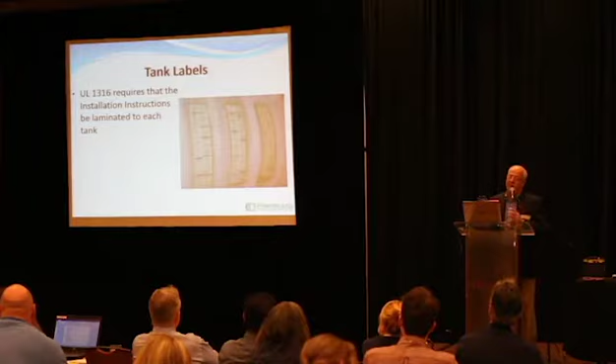No one can ever say that they did not get the instructions on how to properly install the tank. That's part of the UL labeling requirement and internal requirements. All tanks come with the installation instructions laminated to them. So anytime someone says, well, you didn't tell me what to do, that's not true—it's always there right on the tank.

The other thing we would stress is that there's various labeling on the tank: do not overpressurize, do not lift here, use these lifting lugs to safely handle the tank. And I would encourage you, any tanks you see, always look for the UL label. That is the gold standard. That is your assurance that that tank meets the requirements to store the materials intended for. It's been properly constructed, tested, and has the engineering behind it to give long service life.

Along with putting the instructions on the tank, we send a complete package of material with each and every shipment. In that package will be shipping documents, a written copy of an installation manual, which is a 35, 40-page document that covers just about everything we've ever run into.

There are clearly two different companies, at least in the tank business, two different brands, but the information contained is virtually identical. If someone tells me that they have sat through a Containment Solutions training program, I'm fairly confident that they're capable, and vice versa. If they're certified as a Xerxes installer, I think Containment Solutions is very comfortable that they can install their tanks as well.

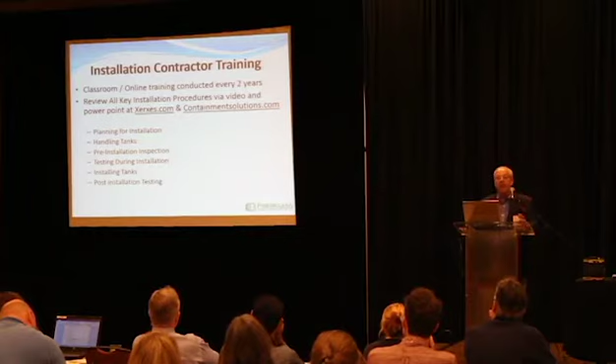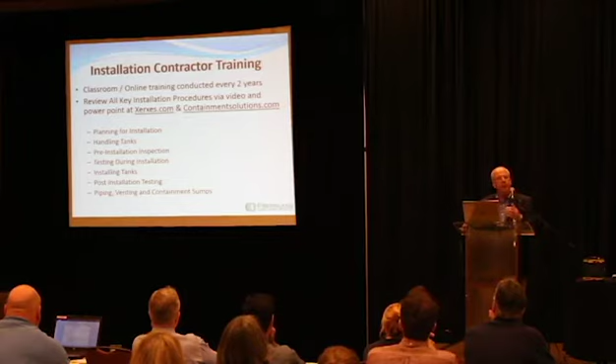Testing during installation, the physical process of getting them in the ground and backfilled. Then any post-installation testing requirements to ensure nothing's happened during that part of the process. Then we cover piping, venting, and containment sump attachment, since that's typically considered part of the tank installation, more on the tank side. So it's a very comprehensive set of steps that we cover for each part of the installation process. And when we tell them there's a written exam at the end of it, we usually keep their attention for most of the four hours.

There's also a documentation program that we have, and I would encourage you that when you're on job sites or talking with your stakeholders in the field, the people working for them, putting tanks in the ground, should be able to document that they've sat through one or both of these programs, as well as the Ameron piece or any other materials they're putting into the installation.

So again, contractor training kits. We have these, but we don't just give this stuff out. When you see the term kit, you might think, well, here you go guys, you're on your own. These are really hand-managed efforts by both CSI and Xerxes. We put a high value on getting in front of that contractor and not just handing him a packet and a video and saying, good luck, hope you retain it all.

So as far as what you can look for in the field, this they typically wouldn't take with them, this is a wall certificate. They can frame it, keep it in their office, put it on their desk, whatever. But I would suggest that all of our installing contractor base should be able to produce a wallet card that says they have been through one of the two programs, or both, and that they've passed the competency test. So I would recommend that, if in doubt, or if the last thing that contractor did was install a septic tank or something, he may not quite be up to speed to do a full-up petroleum installation. So I would recommend you ask them for the documentation.

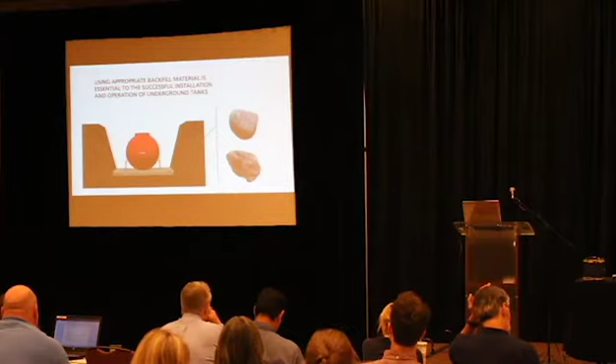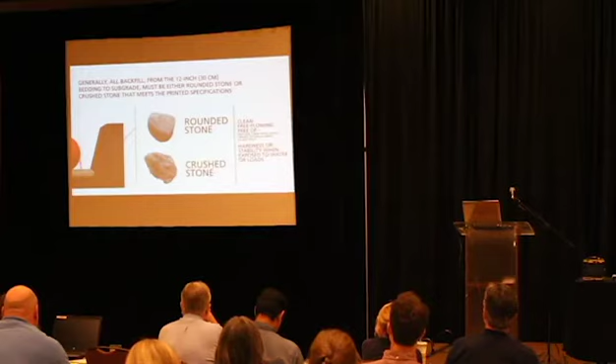Backfill material. Using appropriate backfill material is essential to the successful installation and operation of underground tanks. Using materials other than those specified in the installation manual without our prior written authorization may result in tank failure. Generally, all backfill, from the 12-inch bedding to subgrade, must be either rounded stone or crushed stone that meets the printed specifications. Rounded stone and crushed stone materials are referred to as primary backfill materials in the installation manual.

Rounded stone should be a mix of rounded particles from 1/8 inch to 3/4 inch in diameter. Crushed stone should be a mix of angular particles 1/8 inch to 1/2 inch in diameter. Refer to the installation manual for precise backfill specifications, which reference ASTM material standards.

Excavation requirements. Excavation size is determined based on tank quantity, tank dimensions, along with other key factors explained in the installation manual. Generally speaking, all tanks require a minimum 12-inch thick bedding of approved backfill material. Therefore, key factors for depth of the excavation include bedding, tank diameter, and the required amount of tank cover material, including any concrete or asphalt slabs at grade.

Total depth of cover requirements on our tanks range from a minimum of 12 inches to a maximum of 7 feet. Key factors include whether or not the tank will be subjected to traffic loads and whether the excavation and tank will see groundwater. Refer to the installation manual for specific minimum depth of cover requirements for petroleum tanks.

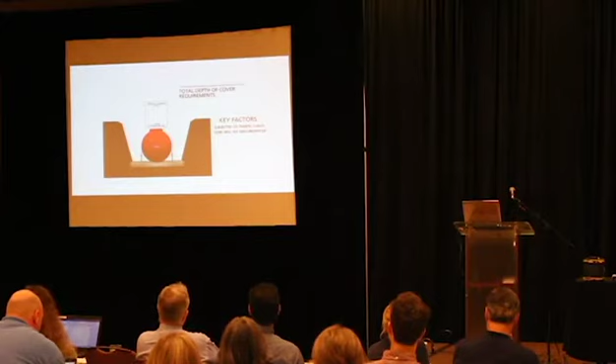Tank quantity, diameter, size, and soil conditions are key factors in determining tank spacing. In all cases, the minimum spacing distance between the tank and the sides of the excavation shall be 18 inches. In the case of more than one tank in the hole, a minimum of 18 inches between tanks is required as well. Spacing between tanks may be greater if tanks are anchored.

If you use dead men for multiple tanks installed side by side, you may have to allow more space between tanks to accommodate the dead men.

If the excavation is in unstable soil, for example peat, landfill, soft, or expansive clay, we recommend that the tank owner seek the advice of a local foundation professional engineer. In your plans, make sure to note that spacing between the tank and the side walls in unstable soils shall be a minimum of 1/2 the tank diameter.

Also, if the surrounding soil is unstable, or if there is a potential for groundwater conditions to fluctuate, geotextile or filter fabric may be required to prevent migration of the bedding material into the native soil or the soil into the bedding. Anchoring tanks: we recommend that every site be thoroughly evaluated for the potential of a rise in the local water table, or of perched or water trapped in the excavation.

Sufficient overburden and/or an appropriate anchoring system must be present to offset potential buoyancy of the tank. If an anchoring system is to be used, note that only our anchor straps may be used when anchoring a tank. We have different types of anchor strap options: standard straps and man-out-of-hole straps.

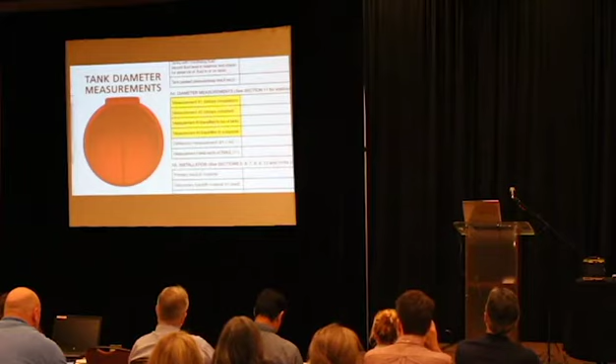This first measurement is used as a comparison reference for subsequent measurements in order to check proper backfill placement and to verify that the installation process is proceeding correctly. Refer to the installation manual for more information on how to take diameter measurements and the allowable tank deflection limits.

On-site air testing requirements: at various stages of the installation process, there may be on-site air testing requirements. To air test tanks, you need to construct a test manifold. The air supply gauge must have a maximum full-scale reading of 15 psig. The pressure relief device must be rated to a maximum of 6 psig, or 4 psig for a 12-foot diameter tank, to reduce the risk of overpressurizing the tank.

For multi-compartment tanks, you need a test manifold for each compartment.

Section 2: Handling tanks. Now that we have explained some general planning considerations, we will begin discussing the installation of tanks, beginning with when the tank arrives on the job site.

When the tank arrives at the job site, before unloading a tank, visually inspect it for any shipping or handling damage. You will have to sign the shipping papers provided by the driver. If any damage is observed, this must be noted on the shipping papers before signing. Refer to appendices of the installation manual to determine the dimensions and weight of your tank.

Based on tank size and design, some tanks are rotated on the trailer for shipping purposes, while others are not. When the tank is not rotated, that is, when the tank is upright, use all lifting lugs to unload and install the tank. Rotated tanks have extra lifting lugs to aid in the loading-unloading process.

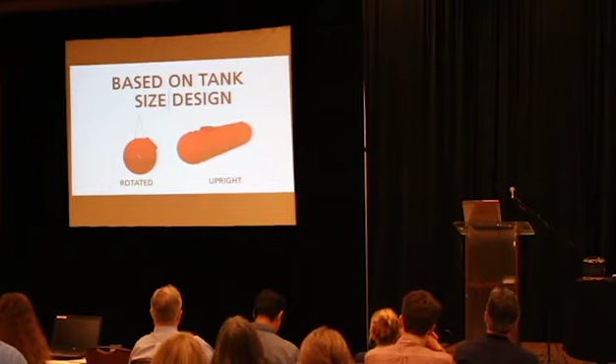Use the lifting lugs that are situated on top of the tank in its rotated position to offload the tank from the truck and place it on the ground. Do not wrap chain or cable around the tank. If necessary, use guide ropes or tag lines to guide the tank. Do not move the tank by rolling it.

Select a solid, level area clear of debris where you can place the tank after lifting the tank off the trailer. When placed, chock the tank, for example, with sandbags to stabilize it.

Section 3: Pre-installation inspection. Our tanks are tested prior to shipment, but they must be tested on-site prior to installation to make sure they were not damaged during shipment. For all tanks, the first test is a visual inspection.

Thoroughly inspect the entire outside of the tank, including the bottom of the tank. Rotate the tank so that you can see the tank bottom.

If any damage is detected during this initial inspection or during any part of the tank install, do not attempt repairs. Contact customer service at the manufacturing facility nearest you. Phone numbers are listed on the back cover of the installation manual.

Section 4: Testing during installation. After the initial visual inspection, different types of tanks require different tests during installation. To help you understand which test applies to your tank, we will describe the types of tanks we manufacture, explain how to perform on-site air testing, and conclude by showing the specific tests that apply to each tank type.

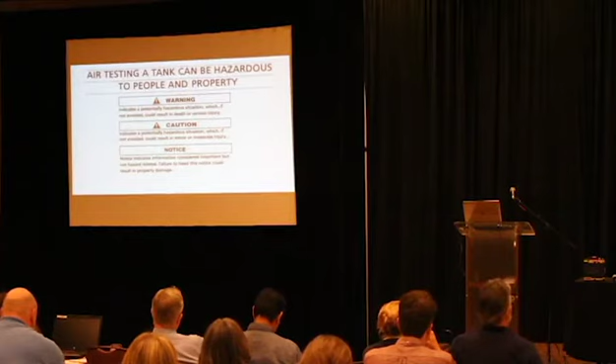Always remember that air testing a tank can be hazardous to people and property. Carefully read all warnings, cautions, and notices listed in the installation manual, and always notify all people on the test site when an air test is underway.

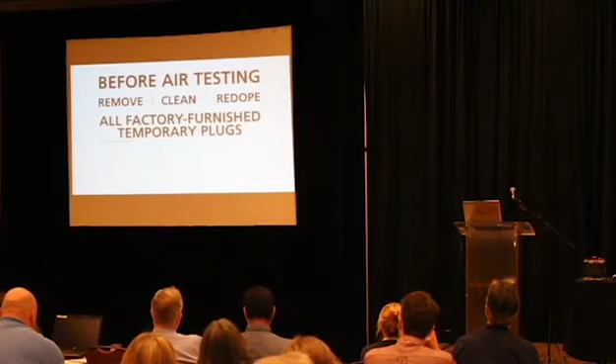Before air testing, remove, clean, and re-dope all factory-furnished temporary plugs with appropriate thread sealant. Then install permanent plugs in all openings where piping will not be installed. Remember that a service fitting is needed for the test manifold described earlier. In multi-compartment tanks, a service fitting is needed in each compartment for a test manifold.

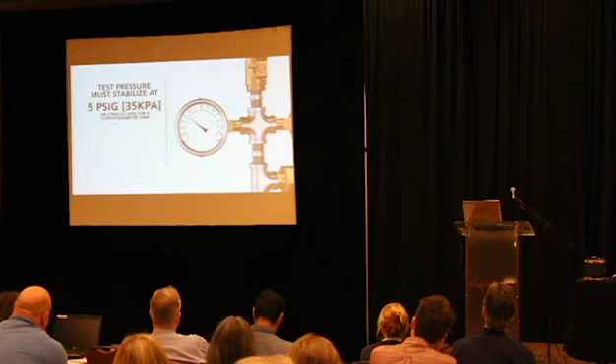In wet tanks, do not plug the reservoir fitting when air testing the primary tank. The test pressure must stabilize at 5 psig, or 3 psig for a 12-foot diameter tank, by adding or removing air as necessary. You must allow for pressure variations when tanks are subject to abrupt temperature changes.

When the pressure stabilizes, close the valve on the test manifold and disconnect the air supply line. After the pressure stabilizes, the minimum air test duration is 1 hour if you are testing the primary tank or interstitial space. Note that you will never apply air pressure to the interstice of a wet tank.

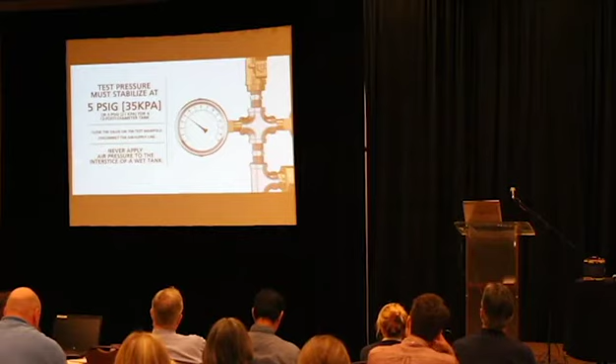When air testing a dry tank, you must never apply pressure to the interstice directly. Those tanks come with a quick disconnect assembly connected to the interstitial monitor fitting. The assembly consists of a gauge, a valve, and a hose. This assembly is not connected to the primary tank until after the primary tank has been tested.

Without releasing the pressure on the primary tank, after testing the primary tank, you will insert the hose into the quick disconnect fitting of the primary tank. This will allow air pressure to flow from the primary tank to the interstitial space.

After pressurizing a tank, apply a soap solution to the tank to check for leaks. When soaping, watch for active air bubbles, which indicate a leak. If you are applying air pressure to the primary tank, soap only the fittings and manways. If you have pressurized the interstice of a dry tank, soap the entire exterior of the tank.

If soaping the entire tank, rotate the tank to check the bottom. Rotate the tank slowly and carefully to avoid developing too much momentum. Make sure the tank's fittings and manways never touch the ground. Do not rotate the tank more than 120 degrees from the tank's upright position.

If your air test is successful, carefully release the air pressure, remove the test manifold, and continue installing the tank.

Now it is time to discuss the specific tests required for each tank type. Testing a wet tank: the first test is a visual inspection of the interior and exterior of each compartment for the presence of monitoring fluid. On the top of the tank, there is also a reservoir. Check that there is monitoring fluid in the reservoir, measure the level, and record it on the installation checklist.

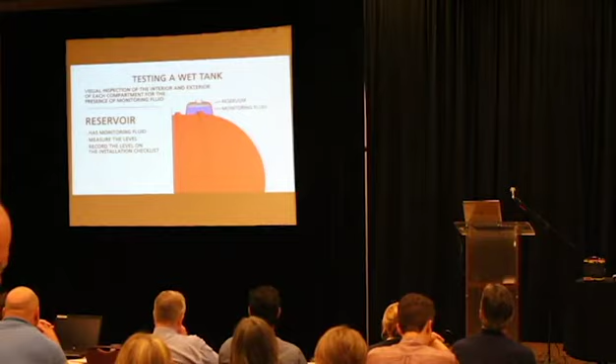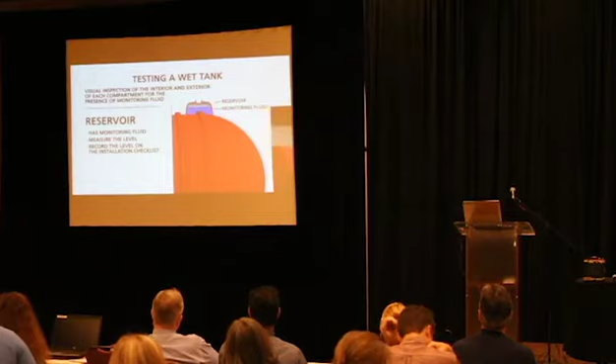If no monitoring fluid is observed inside or outside of the tank, and you have observed and recorded the level of monitoring fluid in the reservoir, you will conduct an air pressure test of the primary tank when backfill has been brought to the top of the tank. When air testing the primary tank, soap the fittings and manways, and look for active bubbles in the monitoring fluid of the tank reservoir. Monitor the pressure for 1 hour. Remember, air pressure can never be added to the interstice for this type of tank.

Testing a dry tank. Dry tanks are shipped from the factory with the interstitial space under vacuum, and are shipped with a gauge assembly attached to the monitor fitting. This allows for monitoring the tank during shipping and handling. The date that the vacuum was applied is on a label near the monitor fitting, or on the shipping papers delivered with the tank. You must record the date and vacuum gauge reading on the tank installation checklist.

For these tanks, you must meet the following interstitial vacuum requirements. First, the tank shipped under vacuum must be under vacuum for a minimum of 7 days, as indicated on the shipping documents and/or tank labels. Second, the vacuum gauge shipped with the tank reads at least 12 inches of mercury. If the tank meets both of these requirements, you may continue with tank installation. If the tank fails to meet either of these requirements, or if the tank was not shipped with vacuum on the interstice, you must air test the tank.

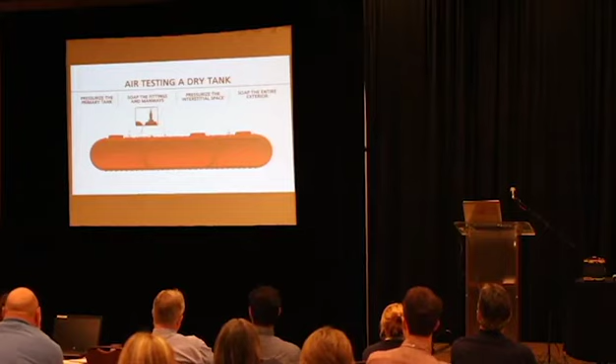When air testing a dry tank, you pressurize the primary tank first, soap the fittings and manways, and monitor the pressure for 1 hour. Then, after the primary tank has been tested, use the quick disconnect assembly to pressurize the interstitial space and soap the entire exterior of the tank. You must also monitor the pressure on the interstice for 1 hour.

After you have either met the interstitial vacuum requirements or passed the air test, you will conduct an air pressure test of the primary tank when backfill has been brought to the top of the tank. At that time, you pressurize the primary tank, soap the fittings and manways, and monitor the pressure for 1 hour. This concludes the discussion of specific test requirements for each type of tank.

If the tank does not pass these tests, or if any damage is detected during any part of the tank install, do not attempt repairs. Contact customer service at the manufacturing facility nearest you. Phone numbers are listed on the back cover of the installation manual.

Section 5, installing tanks. Before beginning tank installation, take a tank diameter measurement. Record this as measurement number 1 on the tank installation checklist. You will measure the diameter again later and compare those measurements to this initial measurement.

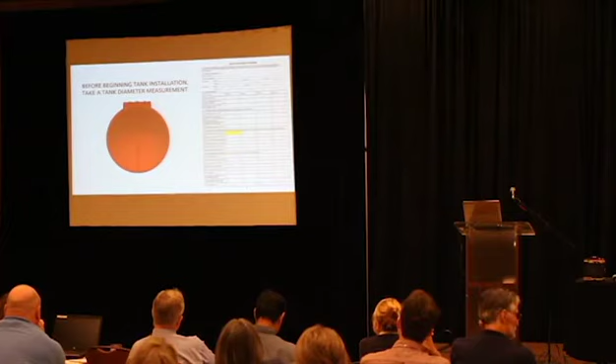If geotextile is used, it is placed on top of a slab or under dead men. If an anchoring system is used, it should be placed in the excavation before the tank. There needs to be 12 inches of approved backfill under the tank as bedding, including when an anchoring system is used. For certain diameter tanks, an option is for the dead men to be placed so the bottoms of the dead men are even with the bottom of the tank, that is, with the dead men placed on top of the bedding material. We are showing standard placement of dead men in this training video. If dead men are being placed on top of the 12 inches of bedding material, you may need to use different turnbuckles and/or use wire rope, depending on the diameter of tank you are installing.

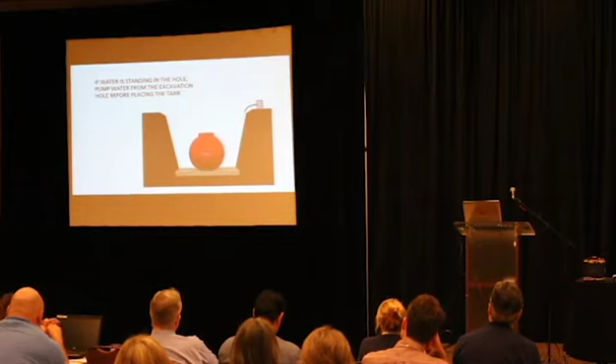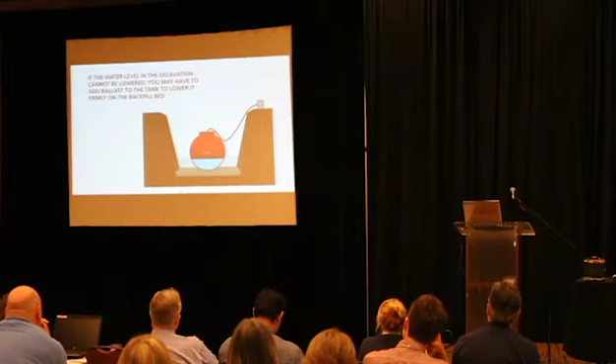If water is standing in the hole, pump water from the excavation hole before placing the tank, and continue pumping to maintain minimum water level during tank installation. Attempt to maintain the water level below the top of the bedding materials until the tank can be fully backfilled and ballasted. If the water level in the excavation cannot be lowered, you may have to add ballast to the tank to lower it firmly on the backfill bed. Use only enough ballast to lower the tank until backfill can be added up to the top of the tank. In a dry hole, the ballast level in the tank should always be lower than the backfill level outside the tank.

After smoothing and leveling the bedding material, place the tank using the lifting lugs. If dead men are in place, center the tank between them. Once the tank is in position, place a small amount of backfill under the sides and domes of the tank to stabilize it. If hold-down straps are used, install them at the locations marked with arrowheads on the tank.

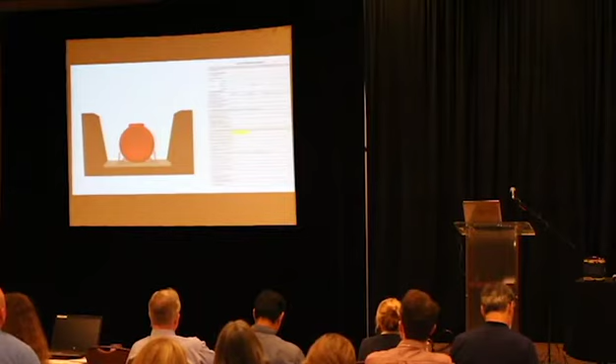Tighten all straps uniformly until they are snug, using additional anchoring hardware such as turnbuckles and/or wire rope. Hardware specifications for each size tank are in the installation manual. After the straps have been installed and tightened, take a tank diameter measurement to check tank deflection and record it as measurement number 2 on the tank installation checklist.

Now you are ready to begin backfilling. For a successful tank install, it is critical that the backfill supports the tank, especially from the 5 o'clock to the 7 o'clock positions at the sides of the tank and under the dome tank ends. This will require handwork. Starting with a 12-inch lift of backfill, use probes to push the backfill completely under the sides and domes of the tank, but do not use metal bars. Take care to ensure that there are no backfill voids under the tank.

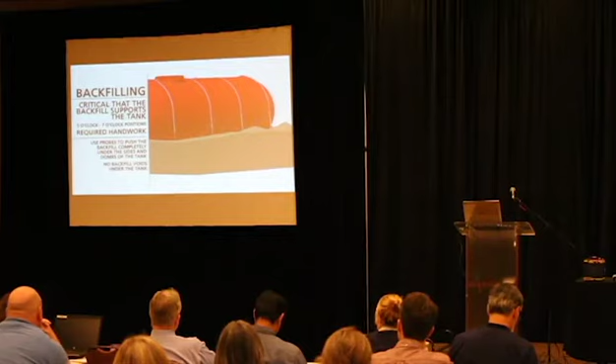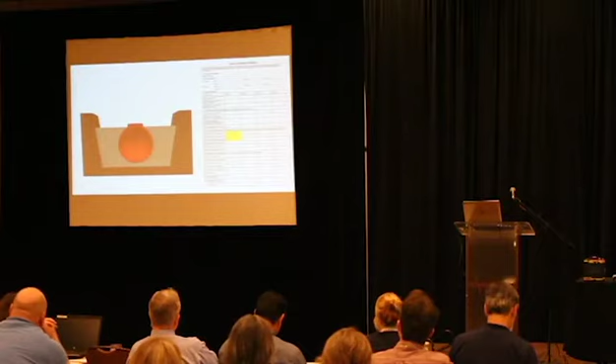Repeat the same process with another 12 inches of backfill. After 2 12-inch lifts are placed against the tank, you can backfill to the top of the tank without further handwork. When you have finished backfilling to the top of the tank, take another tank diameter measurement. Record it as measurement number 3 in the tank installation checklist, and determine whether tank deflection is within the allowable limits shown in the installation manual. As a precaution, many installers choose to ballast tanks after backfill is brought up to the top of the tank.

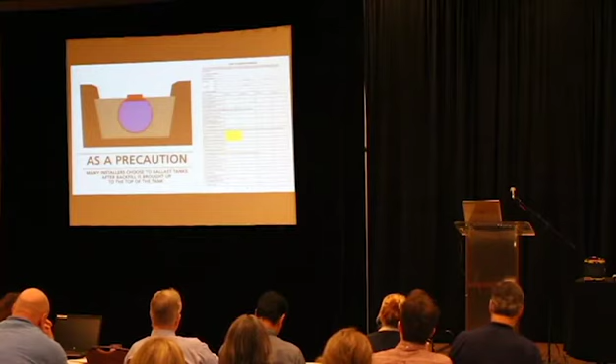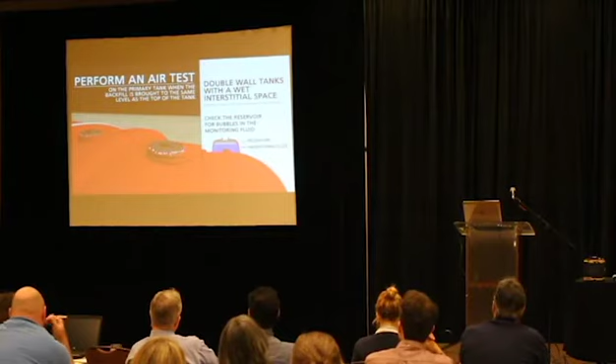Section 6, post-installation testing. You must perform an air test on the primary tank when the backfill is brought to the same level as the top of the tank, soaping just the fittings and manways at this time. On double wall tanks with a wet interstitial space, also check the reservoir for bubbles in the monitoring fluid. Monitor the pressure for 1 hour. If you are going to perform this air test on the primary tank while it is ballasted with water, the tank can be pressurized to the same test pressure that you would use on an empty tank.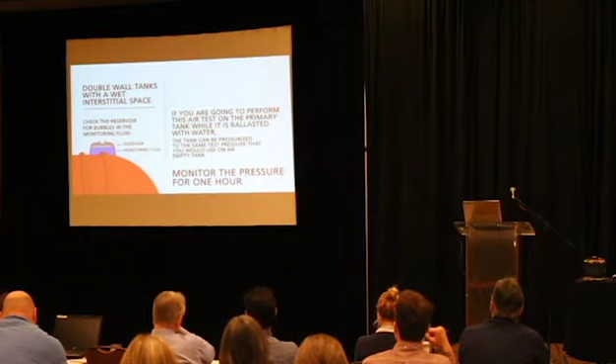At this point, all that remains before you can backfill to grade is to add the tank accessories and piping. Section 7, piping, venting, and containment sumps. The following are some important points with respect to piping and venting. All piping must be...

Stay on schedule. When you get to that last section, you've got a successful tank installation. I mean, from purely a selfish standpoint, everything above that really is out of our domain. The proper installation of the containment sumps, of course, is of interest to us, and the piping going out. But fundamentally, you get to that point in the installation, backfill to the top of the tank. That's how that tank should be for the next 30 years without much change. So we get to that point and everything's been done right. We've got a good installation.

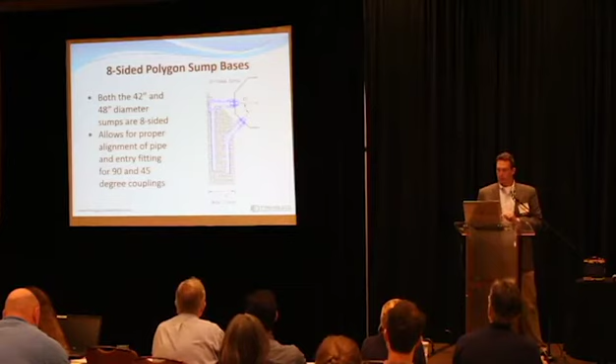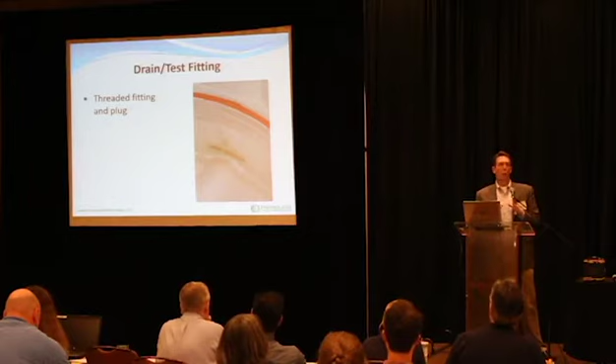The other thing you're going to see in all of the double wall collars is a test plug at the bottom of the collar. This is a threaded fitting that will have a reducer in it and a plug, and you'll see a bit more why you're going to use that, but every one of those collars has those. One of the first things you need to do when these show up is check to make sure that it's still in place so it's there. You're going to need that later.

This is designed for doing annual testing. We use this when they do the testing of these sumps to make sure that there's communication between all levels of the sump. Because when you start talking about a polygon sump system, you've got a collar, you've got a polygon section of your sump, and then you've got the round section at the top. So you've got all three of those that need to communicate. This will let you monitor whether the brine is communicating from the top to the bottom when you do that testing.

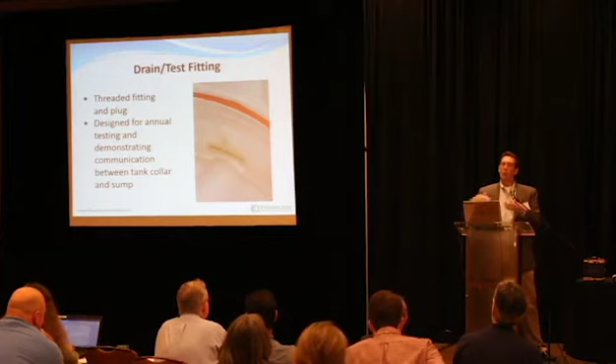Now, in a quick synopsis of the installation, one of the other advantages of using the polygon sumps is the bottom section of your polygon sump is 2 feet tall. So that gets installed onto your collar, and it's at that point that you're going to be putting all of your piping penetrations into the sump. You can hook up your pumps and everything else at this time.

One of the big advantages to doing this, and there's a couple of them, but one of the first ones is you no longer have a confined space issue. You're standing in a sump that's 2 feet tall. It's not a confined space. You can do all your penetrations. You have easy access to everything, both inside the sump and outside the sump. And you have to seal both with a double wall sump, so you need to have that easy access to those.

It makes penetrations much easier, which we've kind of covered already. And the other advantage, a really big one, is once you've done those penetrations, you can now do a test to make sure all those penetrations are tight. This is done before you put the balance of the sump on. And again, not a confined space. If there's an issue, you can remove your water from the test, do what you need to do to fix those penetrations, test it again, and then move on once you're tight.

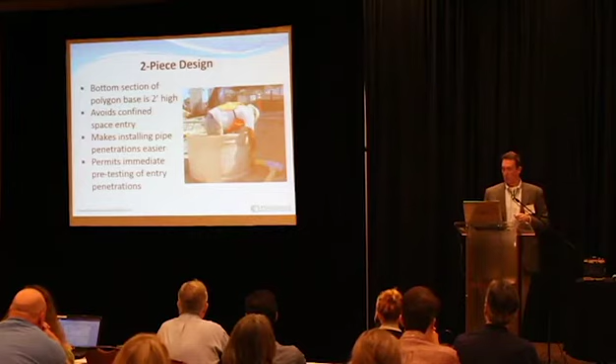There are a couple different options for how the collars or the sumps are attached to the collars, and then the second sections of the sumps are attached to the polygon section. The first one is adhesive channels, which uses the traditional adhesive joint compounds that you see out in the marketplace.

This is what a typical system would look like: you'll see two adhesive joints, one on the inside wall of the tank, one on the outside wall. I want to point out something difficult to see - right in the middle where they go together is a mesh channel. That material is placed in the collar so that when you're putting the adhesive in, it doesn't squeeze down and block the flow of brine through the annular space. That's important to remember. It's something to watch at a job site during installation - if you don't see them putting that in, it's a good idea to ask questions.

The other option is a layup joint, which is basically a fiberglass layup. It's similar, except it's a flat surface with two mating surfaces. We'll look at more detail on both of these as we go through, but I wanted to give you a quick synopsis of the installation - this is the second option for doing your joints for both the collar and the sump itself.

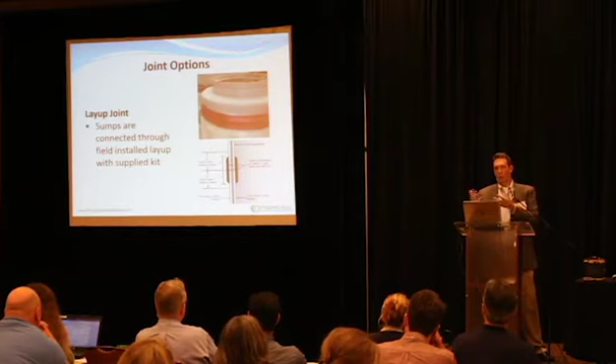The sumps are connected using a fiberglass layup, typically 6 inches wide, going over the joint on both sides, inside and out. To keep the resin from going through those joints, you apply masking tape, typically half inch, and then glass over the top of that. This keeps the resin from going into the annular space, which could cause blockage of fluid flow in that space.

All of our double wall sumps, and I think speaking for Greg as well, come with fiberglass lids. They have no mechanical fasteners - typically just a gasket with compression. They have an optional inspection port, which is very handy for testing, because you place it right over where the reservoir is, giving you access to pull that reservoir sensor out easily. The gasket itself is watertight.

The reservoir is always in the top of the upper section, the round section of the sump, right at the very top, so it's easy access for inspections and testing. This is where the fitting at the bottom comes in handy - typically they'll put a valve on that with a clear plastic hose that they bring up and secure at the top by the reservoir.

The way to check for continuity is to open that valve and allow the brine to drain out. It'll come up into the hose - if it's coming through there, you know it's flowing through, and it'll drop the level in the reservoir. That's a way to know you've got continuity between the collar, through the polygon section of the sump, and all the way up to the top portion of the sump.

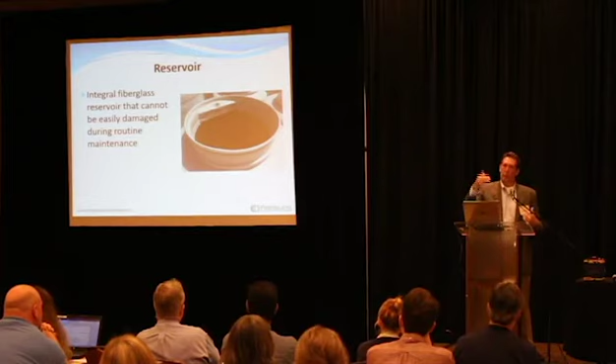The fitting in the top of the reservoir is a NPT thread, giving easy access to put things in and thread the sensors into it. It's at the top, so it's easy to get to, as opposed to putting it outside or at the bottom someplace else.

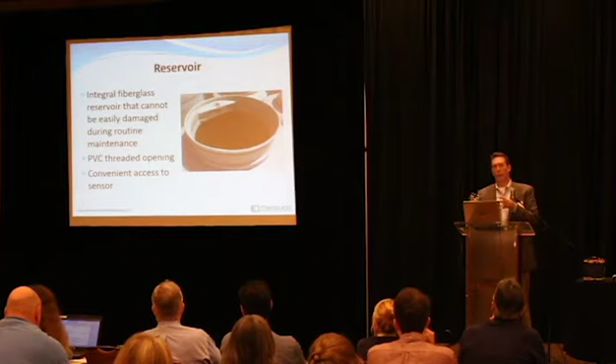All the sumps, when they ship, are palletized, which is important when you get to a job site. Single wall sumps a lot of times will come on the truck and a couple of guys can usually manhandle those off. Double wall sumps are considerably heavier, so it's something you'll have to mechanically unload for safety. You also want to store them sitting upright, so we palletize them to make that easier.

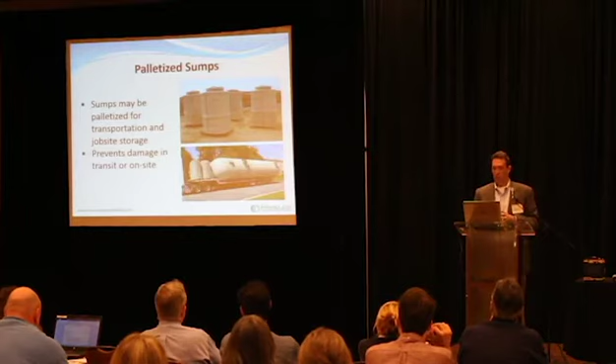And again, that just prevents them being damaged while they're on the job site.

Installation material, like we have for our tanks and single wall sumps, there is an actual double wall sump installation manual, and there is separate installation training. So if you want to be trained for tanks and double wall sumps, it's actually 2 separate sessions. We can do them at the same time, but it's 2 separate sessions. There's a whole separate set of installation training, a separate video or PowerPoint depending on which way we're doing it, and a separate test specifically for double wall sumps. You are registered specifically for double wall sumps, so you will have tank installation training and double wall sump installation training. So you have both.

Here's a view of what the 2 installation instructions look like from both of our companies.

Quick assembly. One of the key things with double wall sumps, and this is true for single wall sumps too, is always dry fit everything before you start applying adhesives. The thing about these sumps and the adhesive kits, or the layups, is once you put them in place, the only way to get them off is to cut them off. It's basically the old carpenter's rule, measure twice, cut once, because once they're on, they are not coming off. So it's important to do all your dry fitting up front, check your heights and elevations to make sure everything's where you want it before you start putting things together.

Determine any length changes you're going to make. On polygon sumps, and even with double wall sumps, all adjustments in height are made on the round section. The polygon section is a set height and cannot be adjusted. So if, say, you've got a 4-foot tall sump, the bottom section is going to be 2 feet and the upper section is going to be 2 feet. If you need to make it something less than 4 feet total, you'll be cutting the round section of the upper portion. The polygon section is not going to be changed.

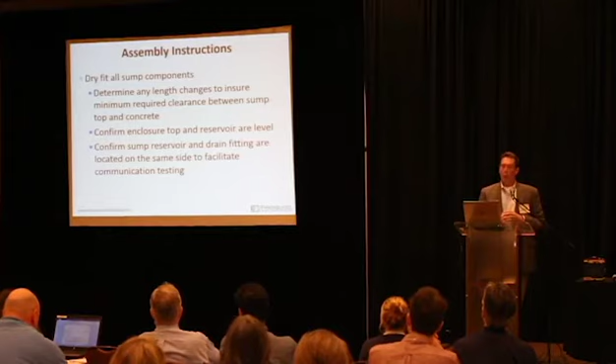You also want to make sure that the drain fitting at the bottom and the reservoir are positioned so they don't have to be exactly straight up and down, but you want them on the same side of the sump so that when you go to do that annual testing, you're not working on both sides of the sump on the inside. You've got one on the bottom and one pretty much straight up above it. You can be rotated a little bit, but it's a good idea to get those aligned as closely as you can.

Again, this is kind of rehashing. If you're going to adjust the sump, you want to make sure you're using the appropriate equipment for that. It's a double wall piece of fiberglass, so you need to use a carbide tip blade or a masonry blade. In the instructions, we spend a lot of time talking about the safety equipment. Make sure you're wearing the gloves, the safety goggles, and all the other things, the respirator, because you're kicking dust up.

The sump body extension, again, the round part is the only part that you trim. The polygon section is always going to be the polygon section, so you make your adjustments on the bottom of your round, and again within a 1/4-inch increment. If you're cutting it, you want to mark all the way around it, get a good straight line and cut on that line. You don't want to have it waving all over the place or be 3 inches here and 4 inches over here. Otherwise, it's not going to be straight when you put it on top.

If you have gaps that are greater than a 1/4 inch, you have to use masking tape. And again, you pretty much need to use the masking tape anyway. It's just a good precaution to make sure that you're not getting that resin through that joint and into the annular space, so it's a good idea to just put that on there. The picture coming up will show you why it's a 1/2 inch—you've got a 6-inch gap, so there's a very small area that's actually not going to be bound by the fiberglass.

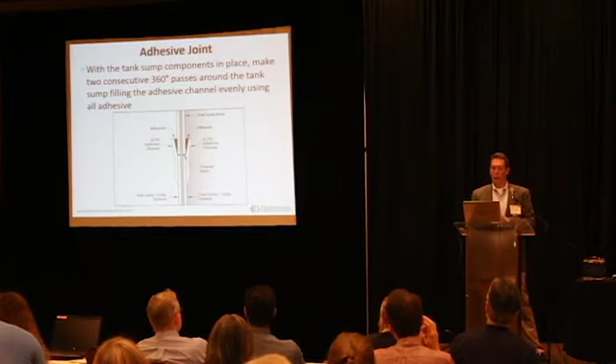So this is an adhesive joint. Again, you saw a picture of this - this is a little bigger version of it, but you can see the two joints, inside and out. You've got the mesh down at the bottom, and you've got the annular space between those two walls. This is what that joint's going to look like.

If you were doing a layup kit, you're going to have it set up, and you'll see here - this is actually without having the fiberglass layup done yet. So you've got the two walls that are butt jointed together. The sumps themselves, when you do a layup joint, come with what we call an H-clip, which you put on top of the lower piece, and then you set the upper piece down on top of it, and that holds them in place so you don't have to worry about them shifting while you're working on them.

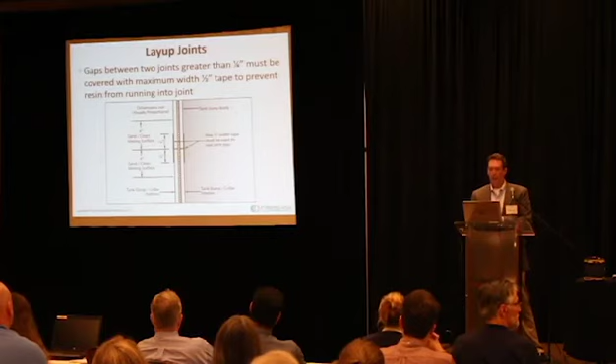You do the layup - you get your cut, put your half-inch tape around it, and then do your layup. We're not getting into all the details on this because it'd take an hour just to go through that, but you'll do your layup, which ends up looking like this.

So you've got 3 inches on either side of your joint, and that's been - we're going to lose you. Sorry. As long as you didn't roll off the back, we're okay.

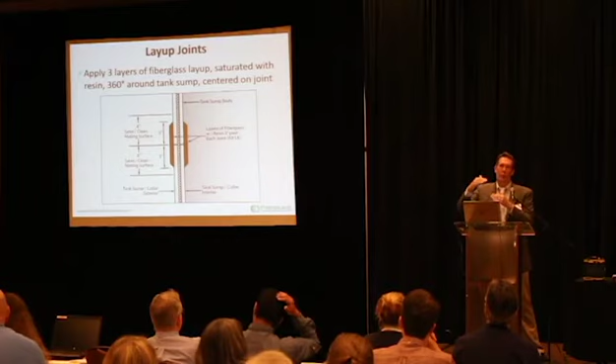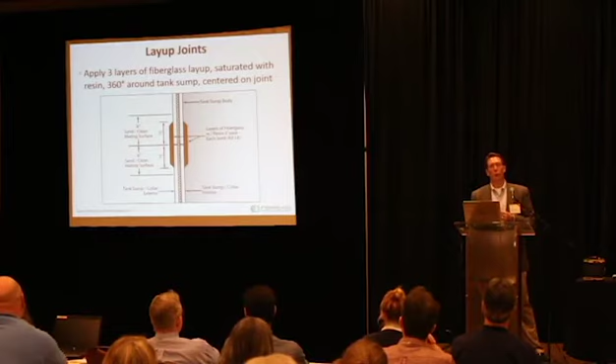So you've sanded 4 inches - we ask you to sand 4 inches on either side. Again, the fiberglass matting you're going to use is 3 inches. You want to have it as close to perfectly centered as you can. We know it's going to shift a little one direction or the other, which is why we give the extra inch of sanding - so if you're not exactly perfect, and none of us is, you'll be okay. But you'll have a layup basically on 3 inches. For either of these applications, the typical cure time is 5 hours. If you can give it overnight, that's even better.

And then all piping and electrical penetrations are supplied by others.

The important part about a double wall sump is you're not just sealing the outside, you've got to seal the inside as well. They have to be sealed tight. And the annular space of the sump is not connected to the piping or the tank. It is an individual system.

I want to point out, we've had a lot of discussion about this internally, and I'm sure Greg has had it as well. We look at a double wall collar and a double wall sump as a little different animal than our single wall collar and sump. It is a system that is designed to work as a system. It's a hydraulic system, a complete system, whether you're doing brine or vacuum.

At this time, it's our intention to sell double wall collars with our sumps. We're not going to sell double wall collars with no sump, because it's too critical to make sure you've got all those annular spaces lined up appropriately and everything working together as a system, rather than just throw it out there and hope somebody else's sump is going to work on it, because I don't want that phone call. So I just wanted to throw that out there.